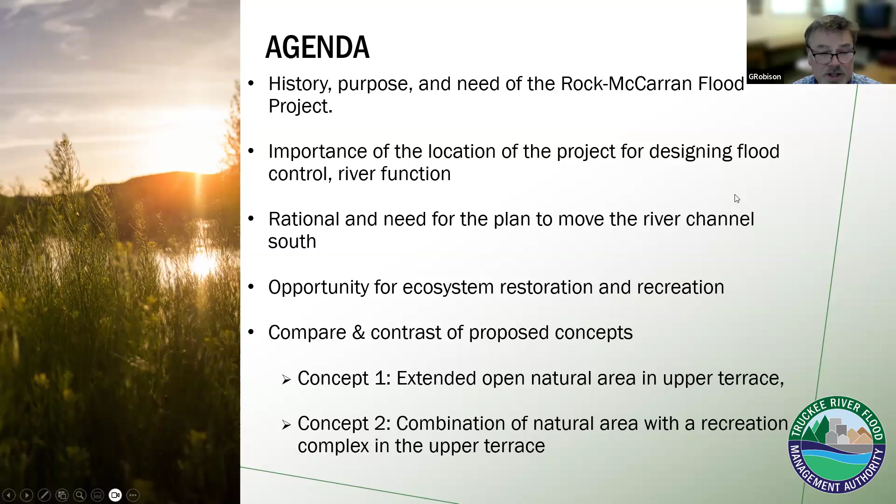So the agenda is: we want to give you a little background on the history, purpose, and need for the project, the importance and uniqueness of this location. That will come somewhat when we're talking about the alternatives analysis, the rationale and need for the plan to move the river channel south, and the opportunity for ecosystem restoration and recreation with this project. We also want to compare and contrast two recreational concepts that we've been talking about, which has been generating a lot of interest and is probably the reason a lot of you are on here tonight - you want to hear about this and also make your voice known.

So why is there a Truckee River Flood Management Authority? Why is there a project? It's because the Truckee River floods, and it's not if it's going to flood again, it's when. There have been major floods on this river in the 1950s, two of them, a major one in 1986, 1997, 2005, and a smaller one in 2017.

So that's a lot of major floods that can do damage, especially in the area around the Truckee Meadows, which is downstream of where the freeway crosses the river - Freeway 395, 580. Downstream from there to the edge of Sparks, the land is flat and low, and there is an awful lot of flooding.

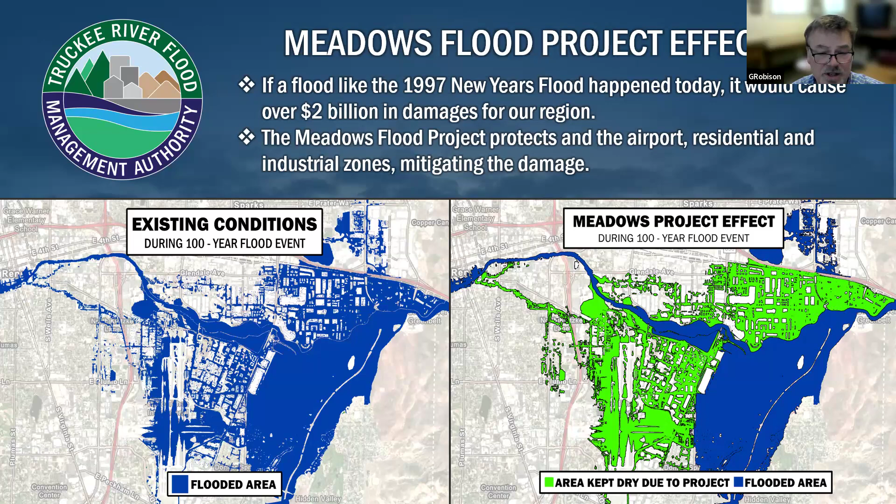That's an overall project, not just the Rock-McCarran project. The overall project has 7 components and some smaller areas we have to look at as well. Going downstream to upstream, Vista Narrows is our foundational piece. That's where we widen the river, create some wetlands, let the river flow and get shallower depth so we bring the water level down in this area so it's not flooding as much.

When we take all these areas, like the Sparks industrial area, the airport, and the Reno industrial area, all of this no longer stores water during a flood, so more flood water comes down and pushes more water this way. But because we do Vista Narrows, it allows this water to get out quicker and keeps the overall water level the same or lower. That's the purpose of Vista Narrows.

The next one upstream is the Rock-McCarran project, and it's unique in that it has a levee on the north and south side, and a large degree of purchased land that we bought back in the 2000s. That land cost the flood authority, or the county at that time, in the $40 to $50 million range. So a lot of land was bought - about 170 acres here.

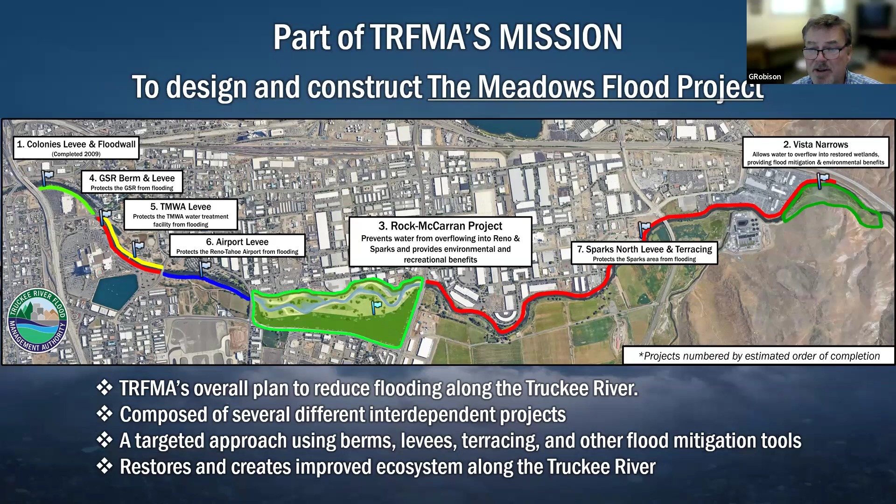And then it increases the flood storage and area capacity within this area to help reduce the peak at the very highest floods. There's also environmental restoration, which is to reduce bank erosion, add secondary channels, construct pools and riffles to develop aquatic habitat diversity.

There are some nice features in here, but it is generally a degraded reach of the river. So we're trying to get this back to a more natural type of river that will be more sustainable, so we don't have to keep training and forcing it into a form that it wants to get out of all the time.

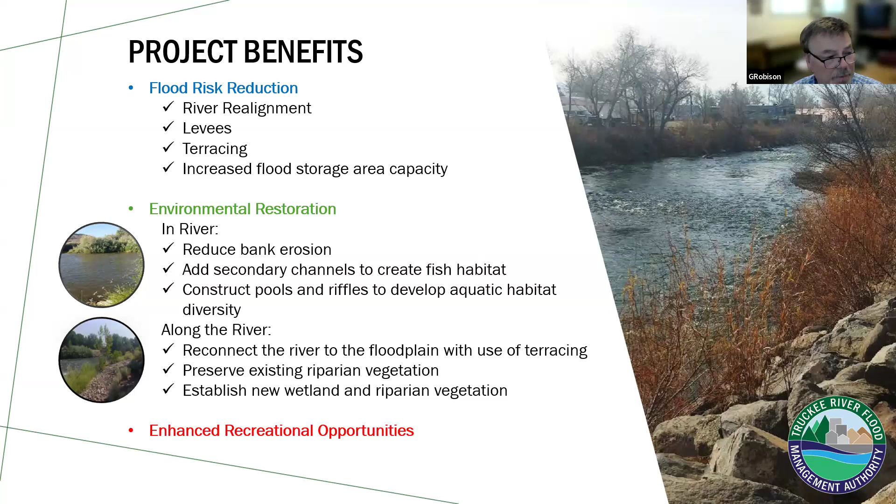Finally, the enhanced recreational opportunities that we'll talk about later in the talk, which I think most of you are coming here for, but those are also very important. That's mostly on the upper terrace that doesn't get flooded very often, but it does get flooded.

This is over a mile of river frontage, 1.2 miles to be exact, under this configuration of river. And it's just a large area that has a lot of possibilities where we're trying to optimize everything for flooding, for river restoration, as well as recreational opportunities.

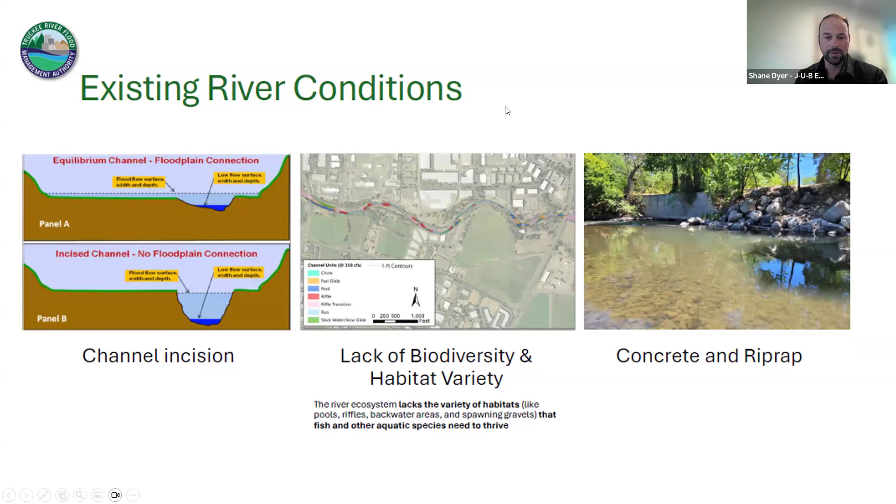In the second image, you can see the habitat has really gone away. It's been pushed in by farming development and is really constrained, so there's a lack of biodiversity, and the pools and riffles aren't where they should be for fish habitat. The last image is typical—the bank of the river with concrete walls, big riprap, high incision, and no connection to the riparian zone. That's the existing river conditions.

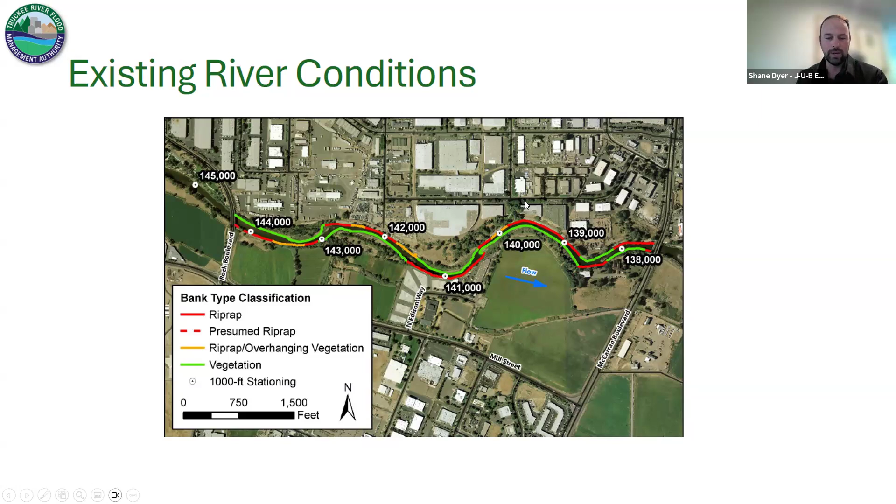Here you can see how much riprap is currently used on the river—all the red. Essentially every cut bank is constrained, and the river continues to incise. This shows how it's really just a man-made reach at this point, and we need to return it to a more natural state.

One of the big challenges was space constraints. The existing river alignment is right up against major industrial buildings, which is a real problem when trying to fit a levee that needs to be 50 feet wide total to meet Army Corps of Engineers standards. A flood wall is not a good option—the City of Sparks and people around there don't want a flood wall that blocks access to the river. That was a real challenge we had to work through: the building constraints, plus allowing for maintenance.

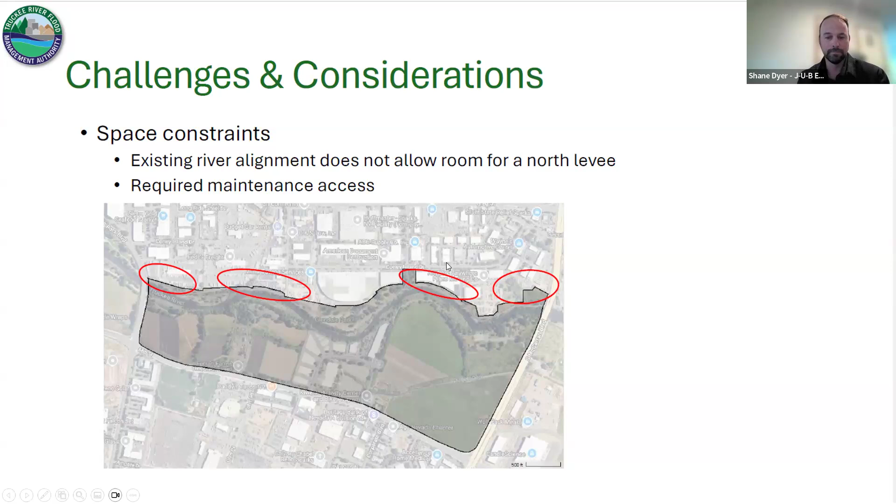It's a complicated geomorphology site—there's a shift in the slope right at our site. It's been fun to work through the geomorphology and engineer with the natural process instead of against it, which is what's happened historically here, working against what the river wants to do. We've worked to figure out what the river wants to do and allow it, creating meander belts, spreading out the river flow, and minimizing hard man-made treatments. Those are part of the goals.

We also preserved a significant amount of the existing cottonwood galleries, which was a big goal TRFMA had for us—try to keep the good stuff and get rid of the bad stuff, essentially.

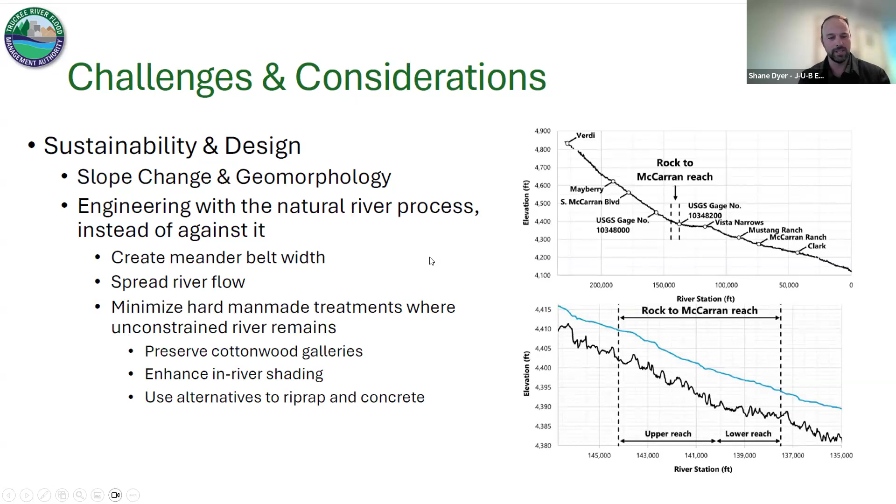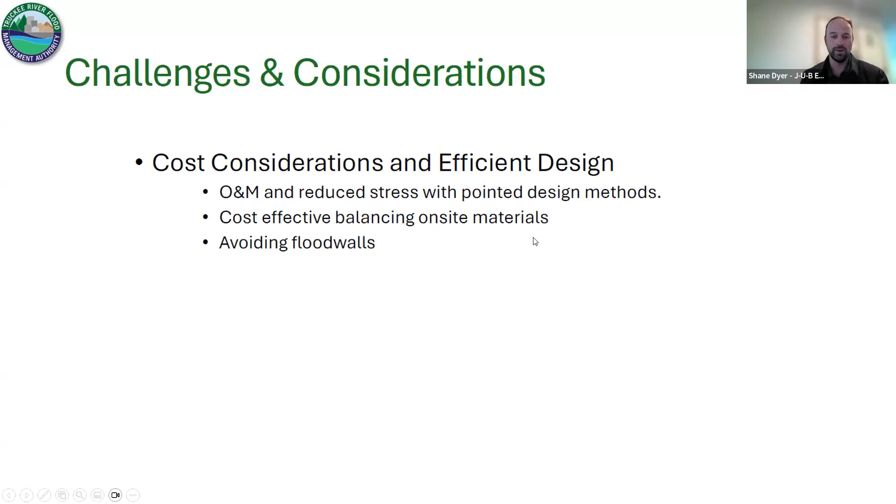Other considerations were cost and efficient design. A lot goes into making it efficient, with operation and maintenance, the velocities of the river and how they scour, and where maintenance will be needed in the future. This whole area, including potential recreation and park areas, is totally floodable, so how do we maintain that cost-effectively? Then there's balancing on-site materials, since there's a lot of earthwork involved, and of course avoiding flood walls.

This talks about how we had a preferred alternative and there were a bunch of recommendations on how to modify it. These slides go over the recommendations for modifying the preferred alternative.

Starting from the left at point 0, we essentially use the existing Truckee River as part of the meander belt, and engineer a secondary channel with a weir elevation that works with flooding and activates at certain flow regimes.

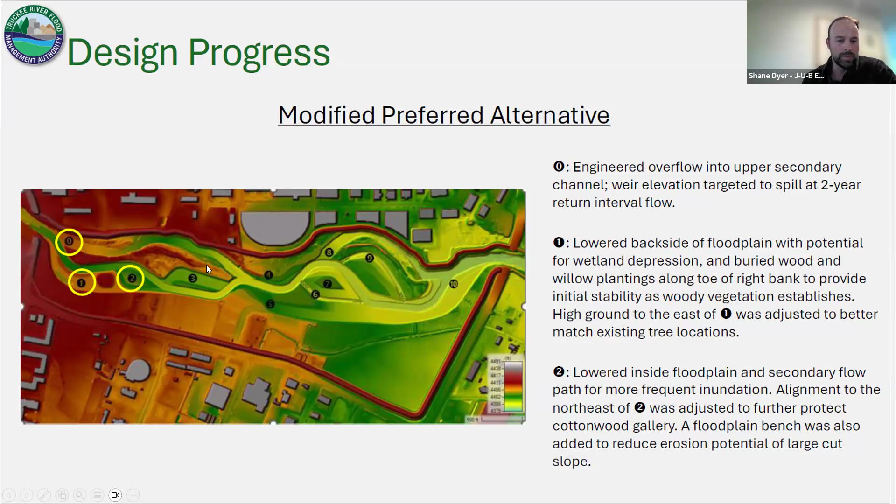At number 1, we added some wetlands for different habitat, which came out of the preferred alternative. Number 2 is similar—we lowered it to allow for a different riparian zone, and also moved it away from the Cottonwood Gallery. That entire island George is pointing to is preserved Cottonwood Gallery with old tree growth that will integrate right into the park.

Next slide, number 3. This was a pond feature in the original design, and we changed it to be a flow feature. So in this modified preferred design, it's a flow feature, so water will go right through.

Number 4, we actually shifted the river away from the levee. It used to go closer to the levee and put more stress on it. The way we moved it leaves the levee more protected.

Number 5, we shifted that flow as well, giving it a more direct path for the upstream flows and reducing avulsions. Before, it was going straight into it, but we made it come off the side of the river so it wouldn't avulse, or break out, quite as easily. That was a comment we addressed there.

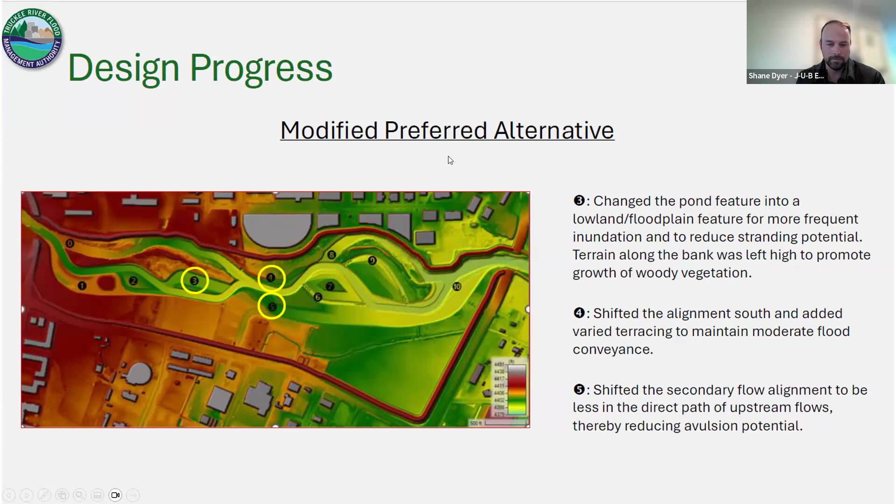Next slide. Okay, 6 and 9 are very similar. We created braided features that are actually active even at low flow, around 300 to 350 CFS average. So it becomes a braided, meandering type river. We added those features, which also adds habitat.

Number 7, we made that island a little stronger and protected it against the river breaking through that spot. And 8, we changed it to a 2-year interval for inundation on that weir. Those were the changes there.

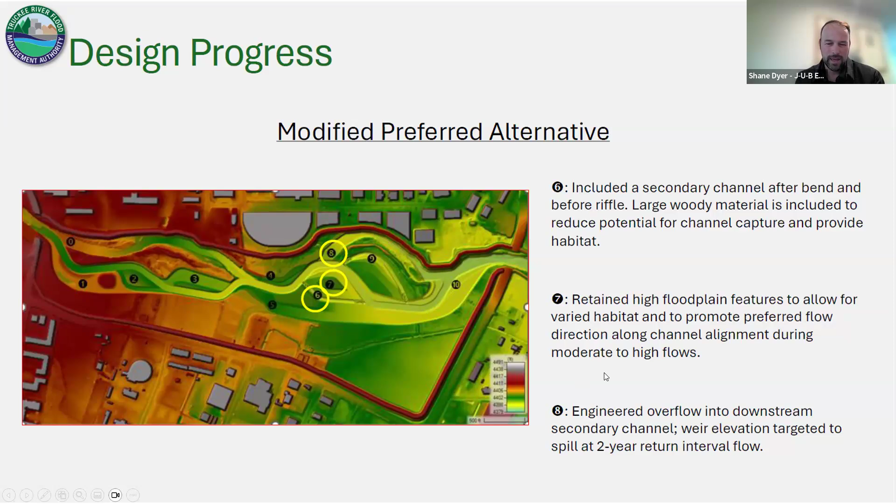Then 9 and 10 - 9 continues to be a channel at low flow for more habitat, and 10, we moved it so the river flows underneath the bridge easier. We turned the river a little earlier and tried to straighten it out to go right underneath the bridge at McCarran. If you compared the original and this one, it wouldn't look that much different, but it's actually a significant number of improvements.

This was done with a team of geomorphologists and hydraulic engineers working together, figuring out what treatments were needed, and looking at a detailed 2-dimensional model to see what these things do to the levees - the outer levees and the intermediate levee down the middle. They checked all that to make sure it was working properly, getting a solution that minimizes future maintenance costs.

Hopefully the river will work with us and cooperate instead of fighting against it like it does now. So a lot of thought went into this - a lot of back and forth, running models and trying to make sure it worked right.

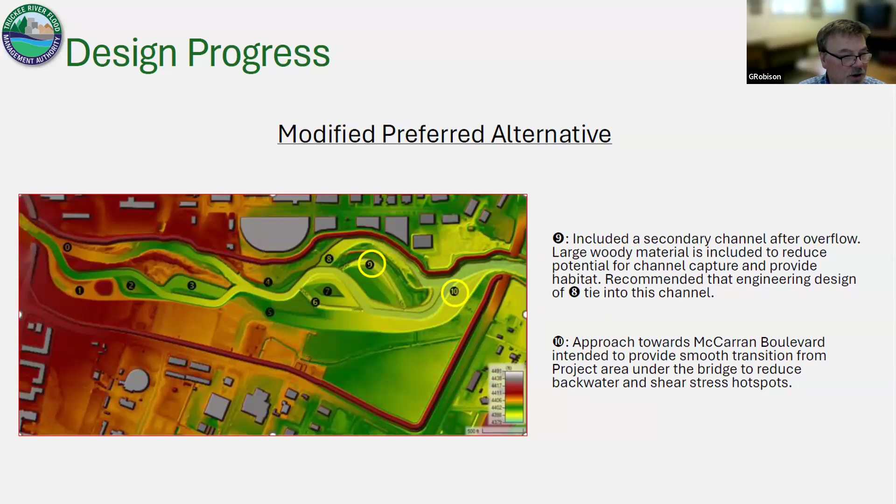Yeah, that's right. Sorry about that, I just wanted to add that. No, thank you, I appreciate it.

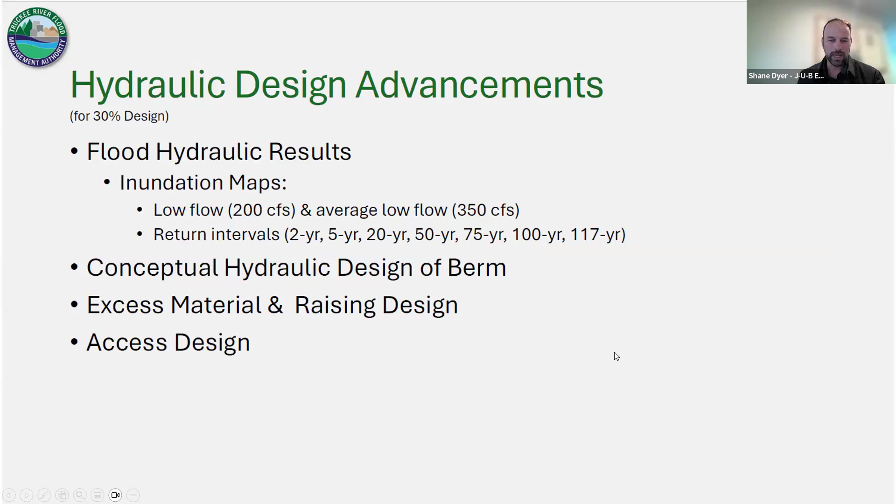Now we're going to go over the inundation maps, which are interesting to look at. We'll look at the low flow, 200, 350, and the various return intervals for the floods.

Thank you, this is Trina. I was just going to suggest you describe what the colors are, because that makes it more understandable. I appreciate that - well, great minds think alike, Trina. That's right.

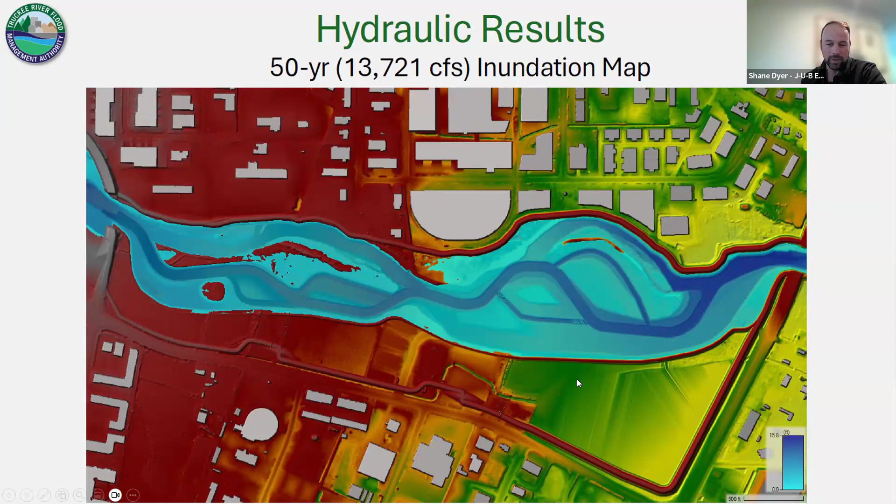It holds back the water in fairly large floods. But then as we go to our next flood, the 100 year, you'll see the entire area is inundated. And this is where we start to see reductions in the peak. It takes some flow off the peak flow on the main flood as it comes through, because we're storing some water in here.

And then I think, oh yeah, that's as far as we go. Well, there is a 117, but I put it in. So that gives you a good idea of what it will look like in a 1997 flood. It would look similar to this, and it would be keeping all those industrial areas dry.

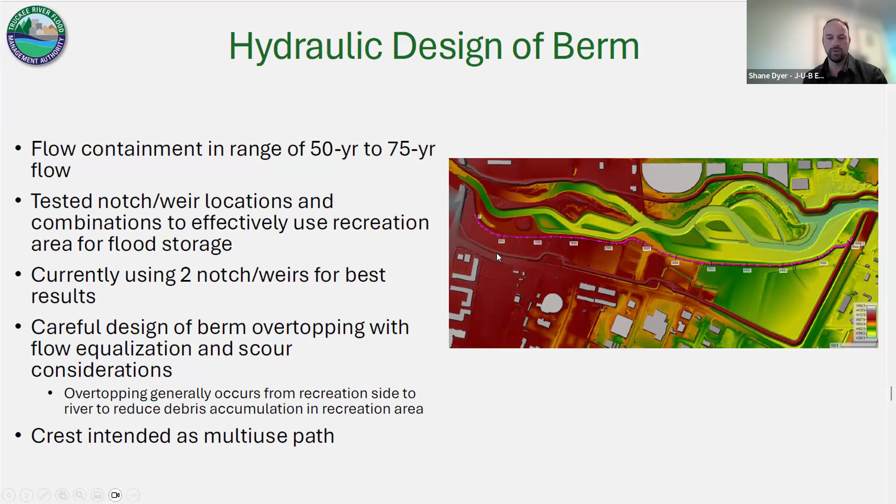So essentially flow containment, this is the intermediate berm. There's flow containment there in the range of 50 to 75 year flood. We tested various notch locations and weir locations, running it over and over again to figure out how to use that flood storage most effectively to get the maximum benefit out of it to keep the peak low. Currently, there are two notched weirs that fill it up, which gave us the best results on how to reduce the flood downstream.

So we had careful design of the berm overtopping, and this is a consideration for O&M and for scour protection. You can see the flow lines where there's long white lines, that's fast water, and where it's more like a dot, that's slow water. At the bottom of this picture, in the storage area, that's slow flow. Then we designed it so that the flow equalizes and flows out over the berm in a way that it takes debris, trees and branches, and tries to get them out of there.

It doesn't go to one spot. It has a kind of uniform overtopping back out of the berm. It's all part of the design that was carefully considered to reduce the overall operation and maintenance of when the flood happens, what's going to occur at the site.

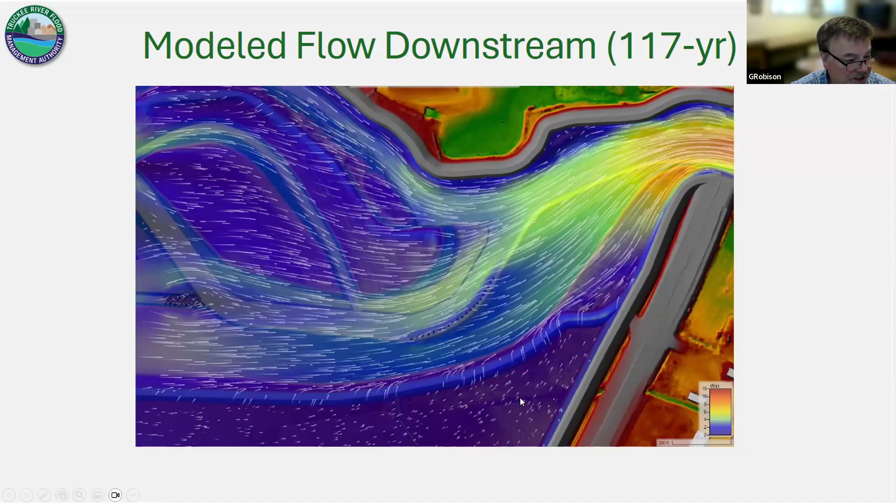So this is where there would either be a nature area or ball fields. What's nice is you can see how all these things are short, meaning they're not getting challenged by high velocity water and scoured. Also, because this is flowing out, you're not having a bunch of debris coming in to land in here. So the idea is to protect this area so it doesn't require a lot of maintenance after a major flood.

This is a cross-sectional view of the river, helping you understand what it would look like starting at the north levee at 0, at the top of the image. You can see how it comes down into that secondary backwater channel, which is the existing river, then back up into the preserved cottonwoods. This will all stay the same with those old growth cottonwoods.

Then we have this side low flow channel, some terracing and habitat through the middle of that, and then the main channel of the river. Then it goes up into that internal intermediate berm that protects the recreation area and the storage area. That storage area is where we would have the flat fields or just the nature park area, whichever direction that heads, and then the south levee.

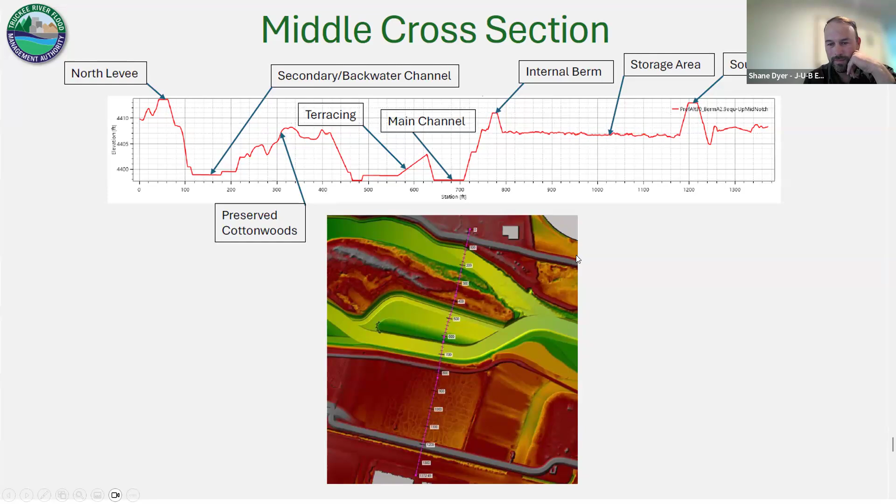Okay, well, that's kind of the gist of all the work that's being done on the river and the alternatives analysis. The geomorphology and geotechnical people are refining all of this right now for the 30% design.

What I'd like to get into now is the recreational concepts in the upper terrace, on the other side of that intermediate berm, the flat area we saw in those two cross sections. That's the area that would either be a nature park type concept or flat fields. Either way, the river area itself is natural.

So there are trails, buffers, lots of things like that in the river area. That's 100 acres, with 4 oxbow parks in either concept. This one would actually have an additional 70 acres of further natural areas, plus some parking and restrooms.

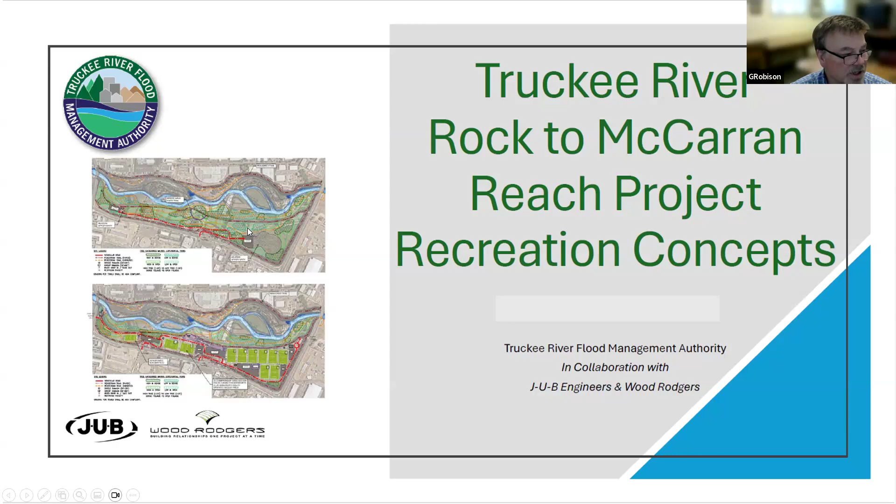So to talk about the immensity of this, I showed you some overlays. Wood Rodgers, one of our sub-consultants, did this for us to figure it out. If you look at Oxbow Park, Idlewild Park, Dorostkar Park, Mayberry Park, Rock Park, Wingfield Park - these are all the river parks. I think there's one or two we're missing, like Glendale, which is actually part of this park, but these are the major river parks, 157 acres. This one plot of land is 168 acres.

And it's a park on both sides of the river. I know Wingfield is also on both sides, and so is Mayberry and Dorostkar at places. But it's impressive that we have 1.2 miles on both sides of the river here. So anyway, there's a lot of things going on in these areas.

It's a lot of different landowners in the past. This was an industrial park right here, and you can see the concrete pads that would have to be basically broken up and moved out. There was farming here - this is the Ferrari Farms.

Even though we purchased this property years ago, we've been working with them and allowing them to lease it back from us on a maintenance lease. And over here, we have another agricultural person that leases property from us - they do maintenance for us, and in turn we let them use the agricultural land.

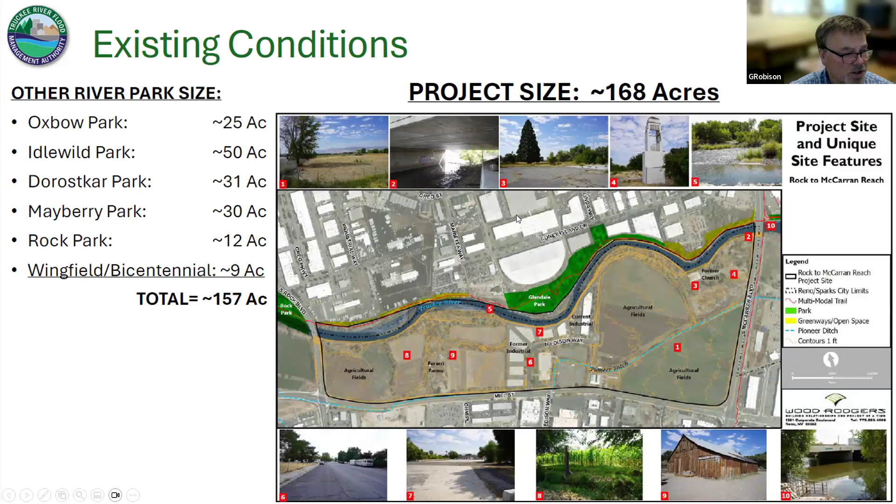Now, one of the things we talked about in a previous meeting is that recreational elements need to be flexible and flood resistant. Certain types of things do not bode well for a floodable area - like, for instance, pickleball courts. Those are hard courts, there are fences, things that debris can get hung up on. They will take some damage in a flood.

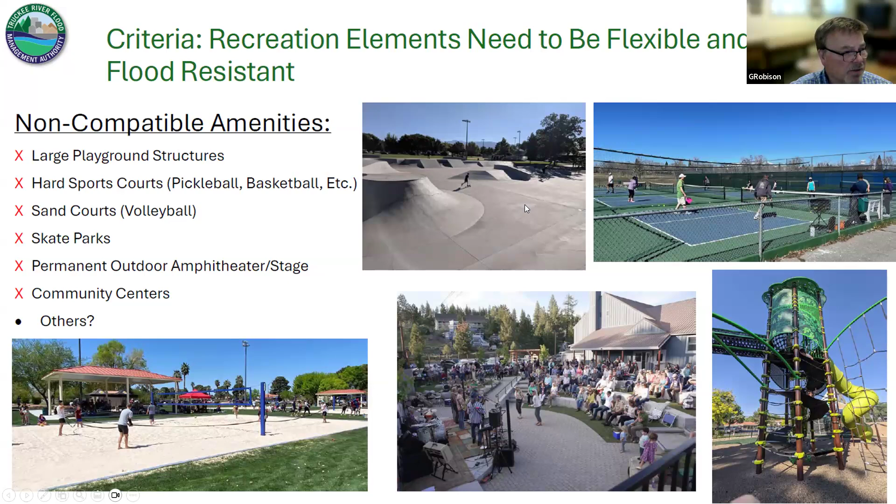We also wouldn't want a sand volleyball court, because even though the current is low, it may pick up that sand and move it, creating contamination in the sand from debris coming in. Hard structures, especially ones that aren't flood resistant, aren't good. Even play structures made of wood could be damaging, and they're also an attractant to children to be playing in a floodable area, maybe when a flood's coming. So you may want to tone down these types of features, and skate parks are hard structures too - these are the kind of things you don't really want in a floodable area.

And the idea with both concepts, whether it's the nature park or the other concept, is you want to have things that are floodable and natural as much as possible.

So, things like a bridge, perhaps trails, pollinator gardens, access to the river, maybe some passive art installations. That's not very passive there, but that's art there. Picnic facilities, trailheads, signage and interpretive signage, those kind of things.

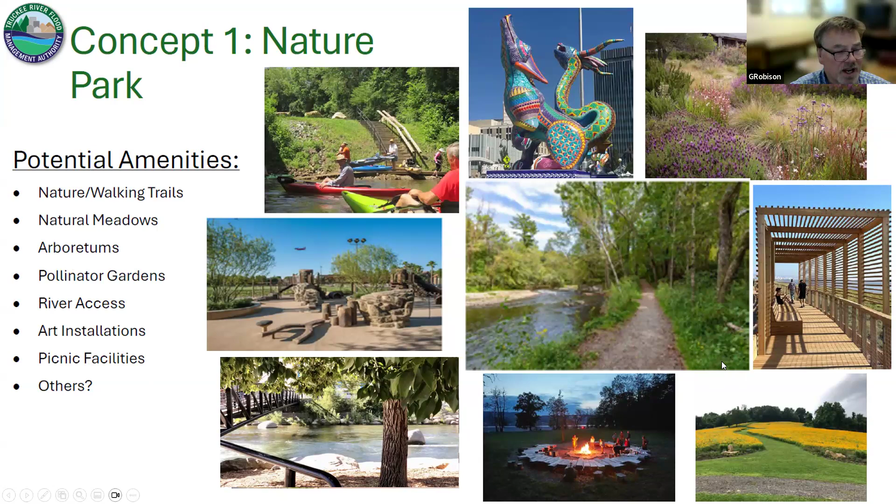When you talk about the recreation complex, it's basically these things along with these fields, and more parking. There would need to be more parking to serve what would happen during tournaments or big days where there's lots of league action or something like that.

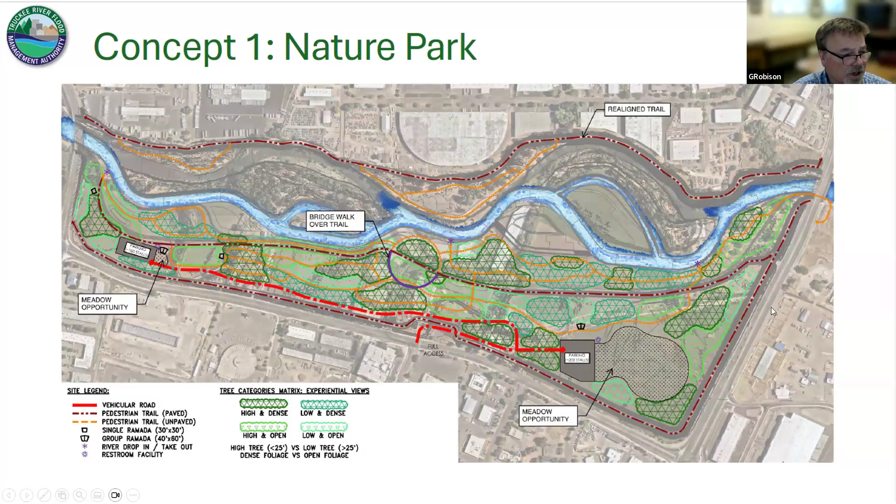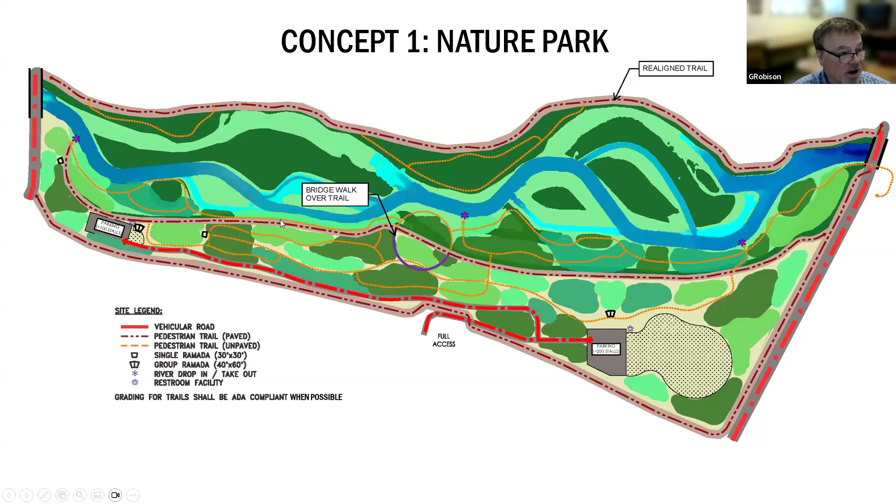Here's another look at it in a more defined way. Everywhere you have these dark green colors, these are tree galleries. Everywhere you see these other blobs, these other colors, these are different shrub types. So this whole upper terrace that's a storage area is full of different kinds of shrubs, big grassy areas, things like that. Whereas in the river area, there are a lot of tree galleries in certain places with this concept as well as the other concept.

The river part is interesting too, in that it's exactly the same pretty much between both options. I didn't mention this for the nature park, but there are 3 access points for kayaking, canoeing, depending on water intensity. There's three entrance points, and these would probably be about a half a mile each—well, this one would be a little less than a half mile—but it gives you a nice run, or you can go the whole way, stay in the park, move your boat, and go right back and do it again. So that's a nice concept here with either option.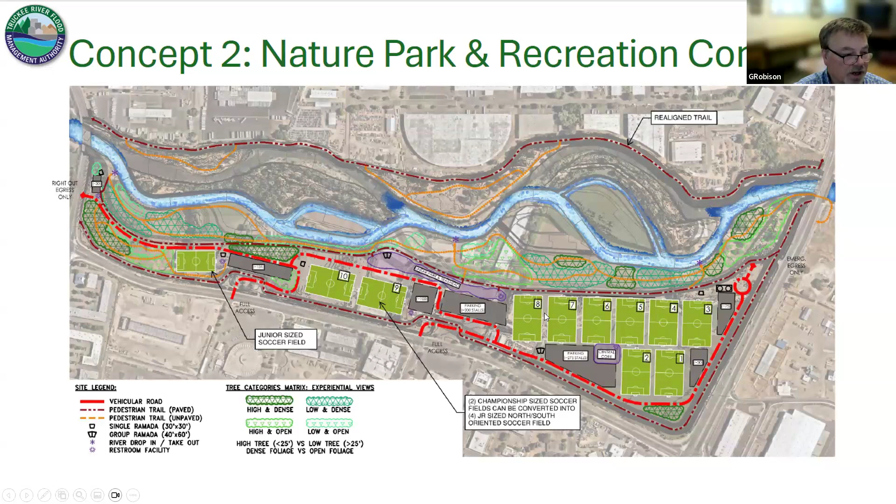Based on all the community comments and based on our environmental team, we're being very careful—if we do this, we have to have proper mitigation and considerations so we don't get phosphorus and nitrogen into the river. We don't want to disrupt wildlife, like the lighting affecting the bats over here. There's a lot of considerations that go along with this particular option as you're building it, and even the operations, maintenance have a lot of considerations as well.

Here's the same one with a more expressive look at it. You can really see the river and how it flows through here. One thing to note: where these fields are thick, there's a pretty heavy duty buffer between this interior berm, or intermediate berm, and the river itself, for protection. This buffer is about 50 yards, half a football field in length in these areas—a little bit more here, and obviously a lot more here.

But the idea is that this needs to be protected. We're a little thin up here, and we'll have to keep refining this. If this is the chosen option, we would really have to think hard about how to protect this stretch of river right here. So all I'm trying to say is, no matter which option we do, we want to think through all the mitigations and options that we have as we go through these things.

And that's what we're doing. Our sub that is doing the work on the recreation is refining this right now. They're doing a lot of work on this, and it may be somewhat different than what you're seeing right now. Not that in principle it's similar, but there are little things that'll be different on both of them. So that's something to look for in the future, because we're constantly trying to optimize and refine.

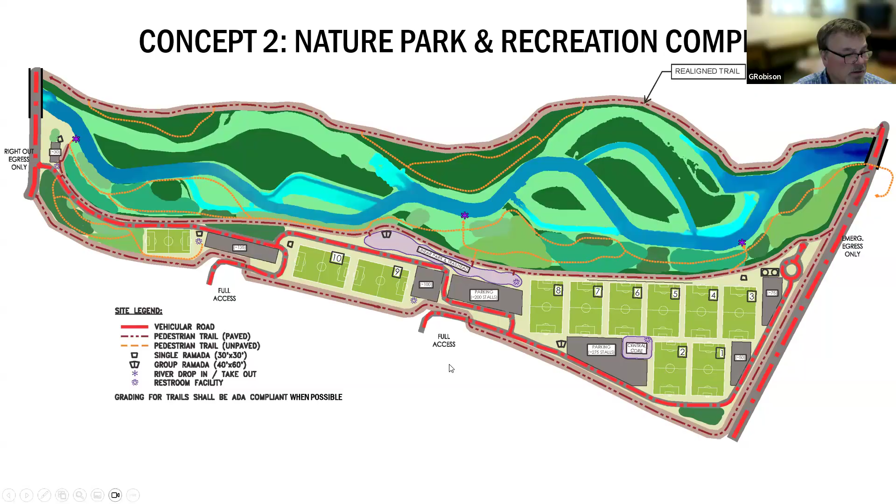So this kind of an overview thing, I could give this to Shane. Shane, why don't you do it? You're so good at this. No, stop it.

This is just the next steps. So step 1, the alternatives analysis, was completed early this year. Step 2, we're working on that 30% design. There's kind of an intermediate step there that isn't on this, which is these two alternatives for the recreation at a conceptual level, maybe like a 15% design level for those two recreation options. That's in between step 1 and step 2, but really we're trying to take the whole design to the 30% in 2025.

Step 3 will be the 60% design, which would be next year. And then we'd move into permitting and final design for 26, 27, and then construction, maybe as early as 27, 28, like that.

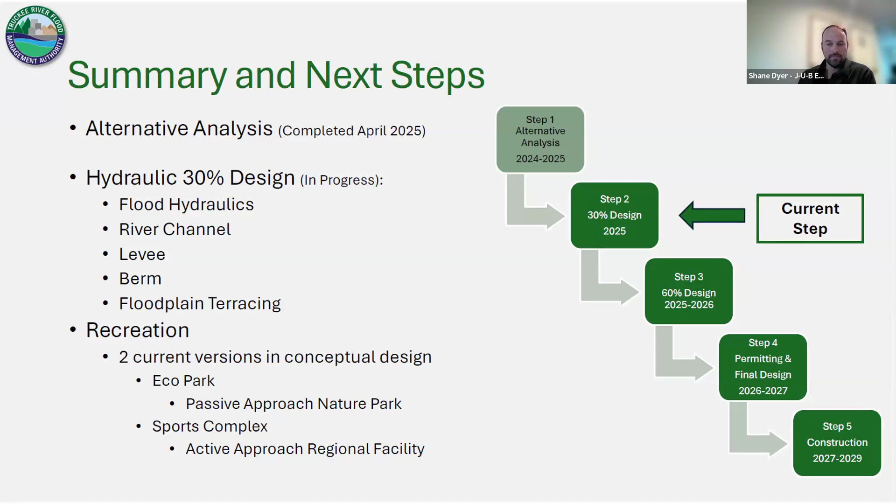Okay, and this is—we had 228 comments, and I'm going to have Marty give us a little summary of all those comments. But we're going to reopen this up for this working group for comments—just send an email to us at turfma@washoecounty.gov. We're also recording this, so when you do verbal comments, it's something we take into consideration as well.

So we will have another comment period for this go round. What we're trying to do is get a good feeling of what the public wants about this before our board votes on where we want to go at the 30% design in terms of how we're going to do the recreation. So that's a big deal, and I know a lot of people want to chime in on that.

We're going to open that up again. Like I said, last time we got 228 comments, but I'm going to stop my share and let Marty give you a summary of what the comments have been like so far.

One moment here. Okay. Just trying to balance a bunch of windows. All right, can you see my screen?

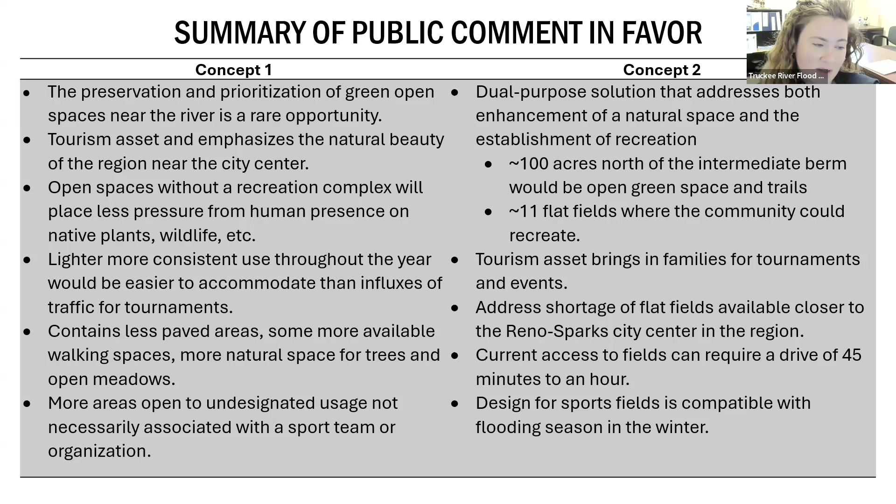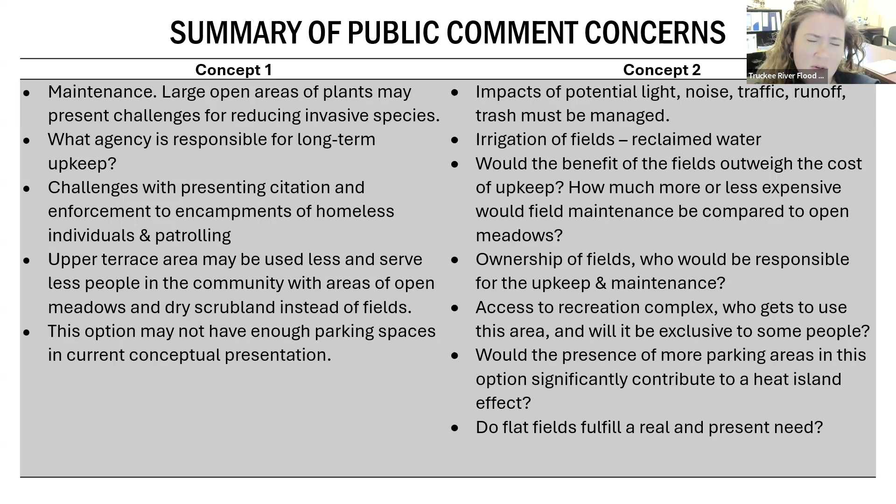A lot of people also asked about the benefits of fields. Would they outweigh the cost of upkeep? How much more or less expensive would they be? So on and so forth. And they wanted to know if the fields fulfilled a real and present need, which it's pretty apparent that they do, but that was a question we got a lot.

Sorry, I'm a little nervous.

Deep breath. So there was a lot of support for building more flat fields especially. As you can see, there were more comments asking for flat fields. We had a lot of people express the difficulty of the current drive up to Golden Eagle or down to Carson, and how it would be helpful to have closer flat fields.

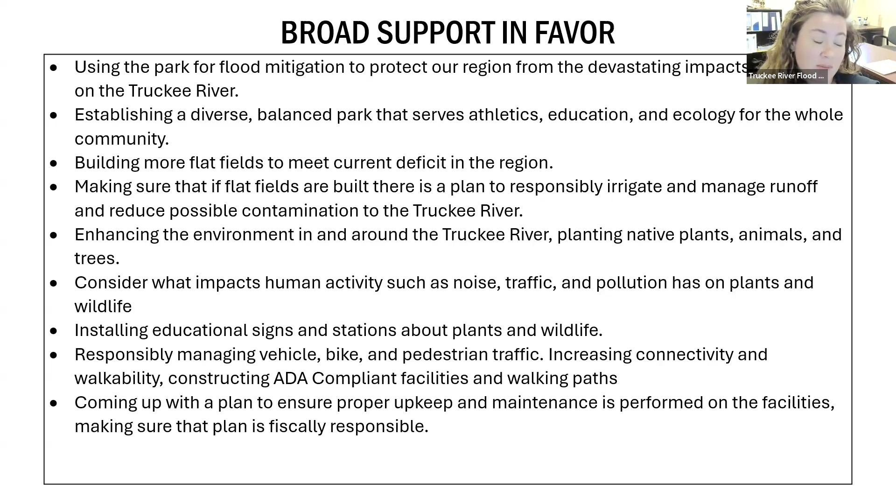Some notable suggestions people put in were the possibility of putting in a bridge across the river, a pedestrian bridge - several people mentioned that. A possibility of blending both options. Connection to the Tahoe Pyramid Bike Trail was important to a lot of people, and that is something we are going to be including going forward.

Permeable paving was something a lot of people brought up, and that is also something we are considering going forward, but it's early in the design process. Several people wrote in concerned about the Kiwanis Bike Project - that's another topic I would toss off to somebody else to discuss, but it's something we are thinking about and considering deeply. There's also the consideration of access on Rock Boulevard, which might be thought about or brought up.

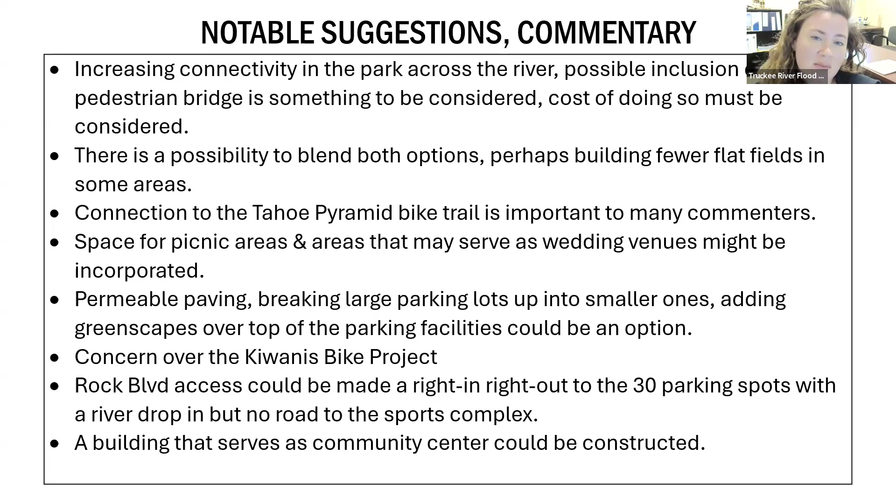And the possibility of maybe a community center as an option. Again, these are all just things people suggested as they wrote in with the comments. And that's the presentation.

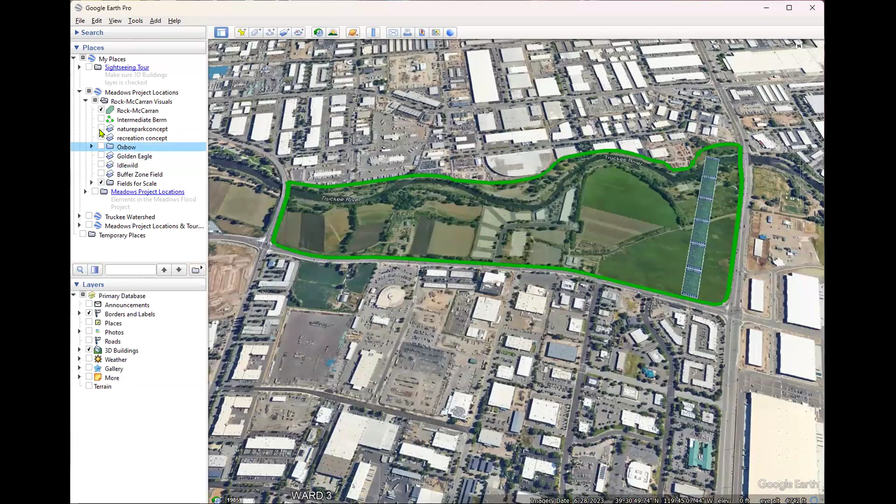But the Truckee River is just so important, and it just can't be constrained. And I love walking that, because when I was going out with my husband, and we've been married 37 years, we used to walk between Cottonwood Park up to Rock Park along the river. And just seeing the changes that have happened, but being appreciative of just letting land be land, and also further downstream, the Nature Conservancy, what they have done with the Truckee River closer to Wadsworth and Fernley, I think is so important.

It's just, we live in the Great Basin. This is an important river, and you just can't optimize it for, oh, let's have sports fields along here. No, we need to just hold on to the nature that we have. And that's all I want to say.

Thank you. Thank you. Thank you.